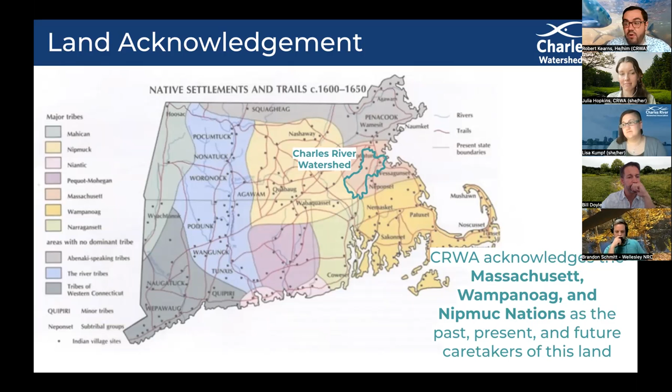Next slide. I know some of you are familiar with our work, but if you are new to CRWA, we are one of the oldest watershed organizations in the country, founded in 1965 by a group of concerned residents who really had a vision for cleaning up the quality of the river. We've come a long way since the song Dirty Water, and there's still a lot of work to do, including stream restoration, dam removals, increasing public health from the sewage overflows in the lower basin, but also stormwater pollution, which is impacting our river and tributaries all across the watershed. We have an interdisciplinary staff with different program areas, and our mission is to help protect and restore the river using science, advocacy, and the law, and promote environmental equity.

So we're really excited to be talking to you all today about stream restoration. It's a really hopeful topic, a very exciting topic. I'm going to go to the next slide.

You may be wondering, if you're not as familiar with the Charles River, you may know the lower basin in the Boston, Cambridge area, but the Charles actually flows all the way from Hopkinton, Mass, to Boston, similar to the Boston Marathon, but it's a lot longer—over 80 miles long. This map shows all of the different communities, the 35 cities and towns in the watershed, where all the rain falls, hits the surfaces, and that all gets into the river. We just wanted to give a perspective of that.

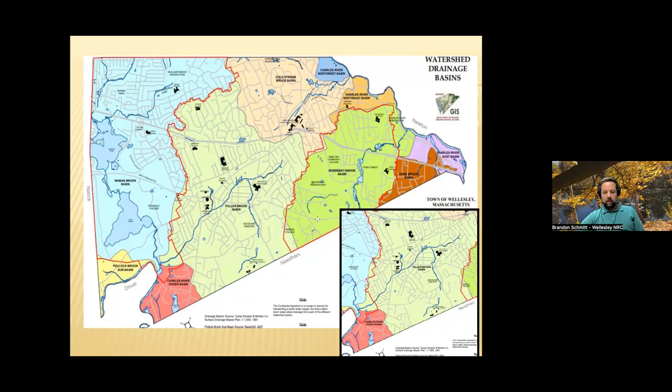Fuller Brook Park is in Wellesley, Massachusetts. The Fuller Brook, as well as the upper portion called Caroline Brook, are part of the Fuller Brook subbasin. It's the town's second largest watershed by area, but densest in terms of properties that contribute to it. The park is 2.5 miles long, encompassing 25 acres with approximately 120 direct abutters. The watershed itself is 3.2 square miles, or roughly 2,000 acres.

Just a quick outline: I want to go over some of the project history, the goals, which include trails and pathways, ensuring the historic features are maintained, and then the meat of this presentation is the stream restoration.

The park was first established in 1899 and finally completed in the 1930s. From its infancy, it was a multi-use park created to drain water from the surrounding lands and provide parkland and transportation. Along with the town's engineers, they worked with consultants including John Charles Olmsted from the Olmsted firm, Warren Manning, and Ernest Bowditch.

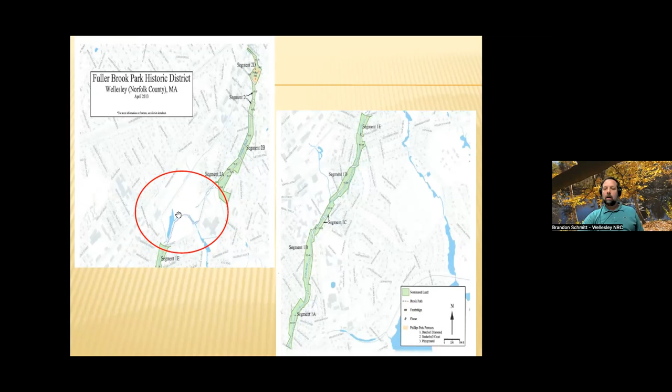The park, with the exception of the circle in the middle, is on the historic register, due to the firms involved and the park design from Olmsted in the 1900s. This area was considered too disturbed - it includes our high school track and field, as well as a series of other athletic fields, and the stream is actually still culverted until it reaches a pond here.

I want to acknowledge that due to the multidisciplinary nature of this project, town meeting formed what was called the Fuller Brook Park Coordinating Committee. This was an appointed board by the moderator, and hours and hours of work went into that from those volunteers to make this possible.

I'll just mention the final price tag - I think what was funded was about $5.5 million. Grants were able to bring that cost down, but that's just giving you an idea of what it cost.

The project goals were to improve the pathways, improve vegetation, maintain the historic features, and improve the drainage in the stream course.

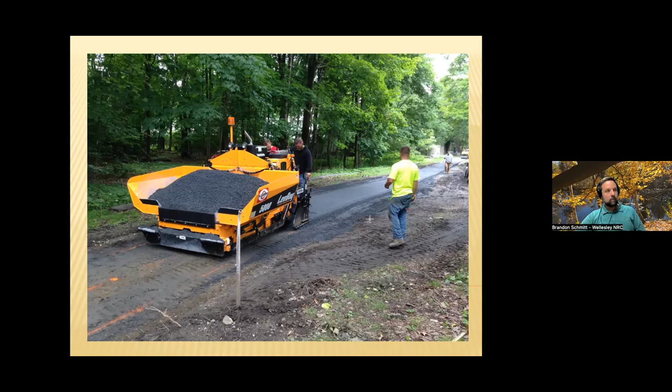In very low-lying areas where there's wetlands, they built raised boardwalks. They also addressed street crossings that were not marked and curbs that were not cut - that was all part of the project as well.

One of the unintended consequences is that now that more and more people are using it, we're dealing with policy discussions about how to deal with mixed pedestrian use with bikes, and now with e-bikes - how are we going to regulate that?

That's a consideration. We included new wayfinding signage for the park, new access points perpendicular from various neighborhoods. And there's a series of bridges that were added on after the fact - we said, while we're in here doing work, we might as well replace these bridges that cross the brook.

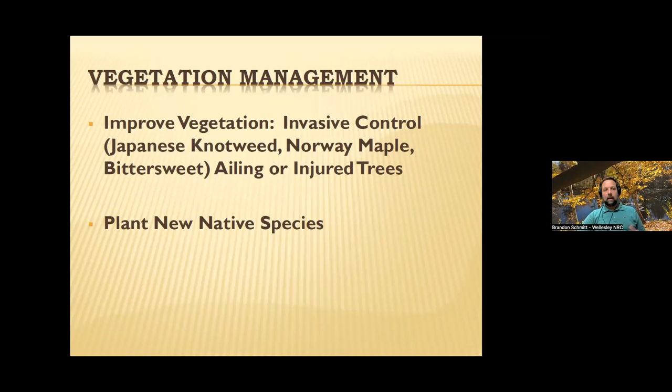So vegetation management, as I'm sure everyone on the call is familiar with, we have invasive species and we're still dealing with those—primarily Japanese knotweed, Norway maples, bittersweet, ailing and injured trees—and of course we wanted to add new plant material.

First up, these are mats that were installed to cover knotweed, essentially sterilize it. These are still in place 6 years later. We're not really sure what to do about this, but we did put in our capital budget this year a small request to do a test plot and see what happens. We're working with a consultant who will do the physical maintenance when we pull it up. We suspect the knotweed will still be there and be more than happy to grow back, but there's a series of these mats. They're not popular, but effectively they're keeping the knotweed at bay at this point.

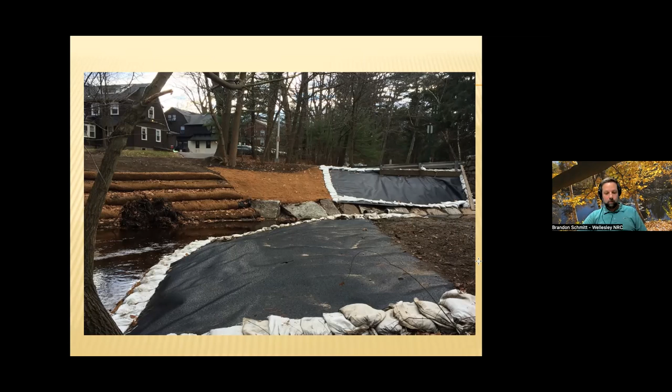Here's another picture, just giving you an idea, with the coir fabric on one side, the stream construction, and then the knotweed on the other.

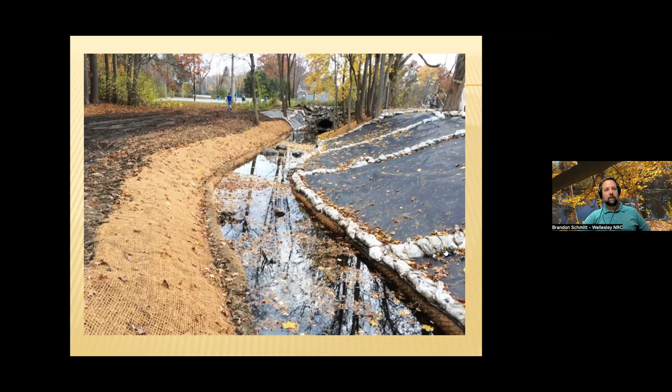We hydro-seeded a lot of the areas adjacent to the path, and you can see someone down here removing knotweed. Same thing—we tried to preserve some trees, and we have seen knotweed popping up here. Again, 6 years later, it's still there. It's just going to wait.

Some of the trees we were able to preserve, like this one, was popular, so they dug it up and relocated it.

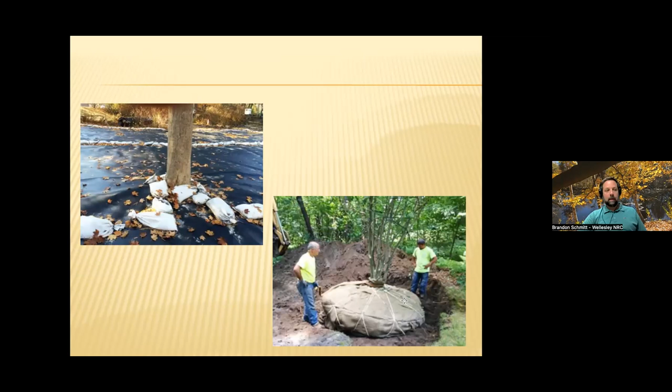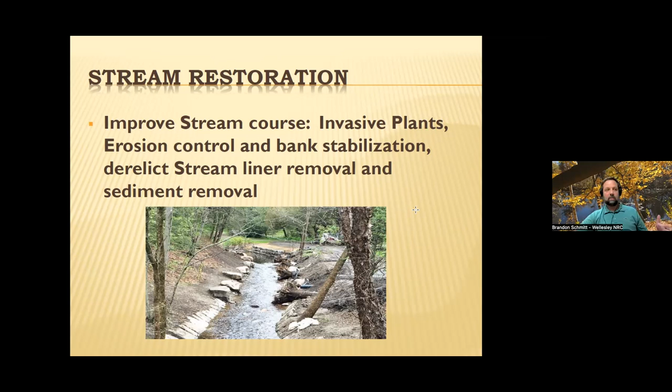It's small, and in a big rain event, it does get flashy. So we wanted to slow it down, provide habitat, and prevent flooding.

In order to construct sections of the stream, they would have to essentially take them offline, run them through pipes, 150 feet at a time, using pumps and hoses.

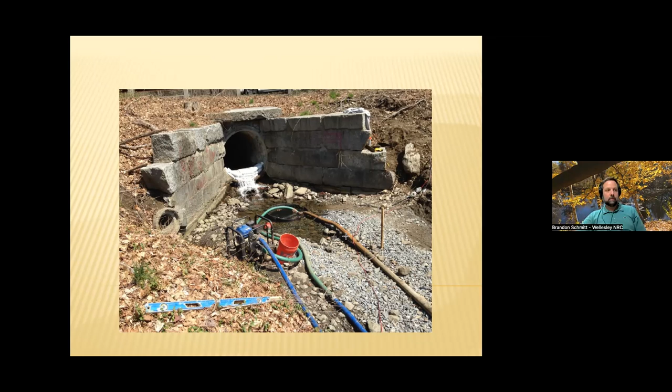Here you can see sediment deposition. So this was a big thing, recarving the base of the stream.

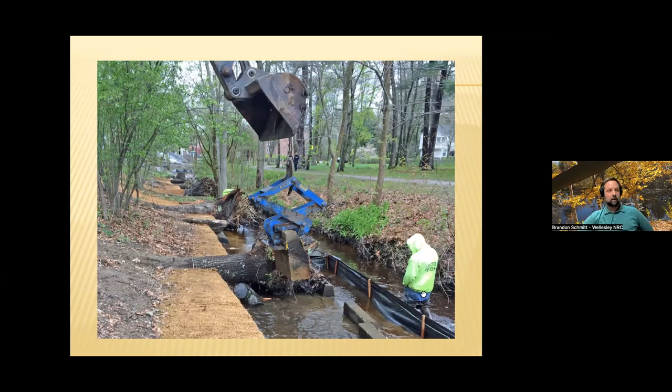These revetment walls they built wherever there was kind of a hard curve, stabilizing that.

Rock vanes are these rocks that they put in to add oxygen to the water and provide habitat.

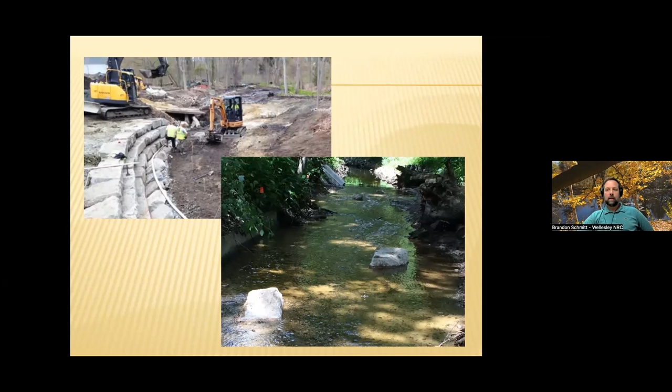I just put this on—this is a specification. So some of the walls and the coir fabric, we would use live stakes, so planting dogwoods.

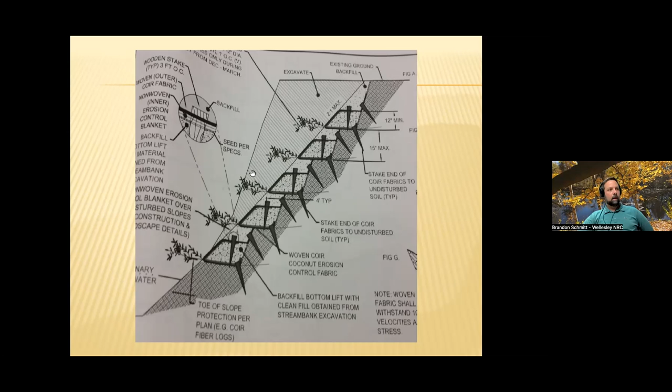This is the specification for what's called a root wad. They would remove mature trees, typically Norway maples, and shove them into the bank. This is really what's stabilizing the bank, with the flow of water going from left to right in the picture, and it provides additional habitat and additional agitation to add oxygen.

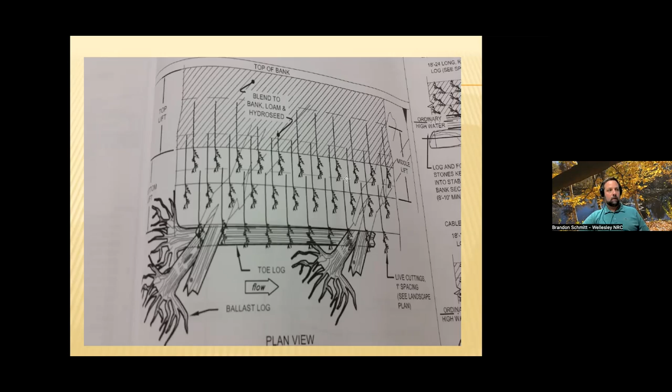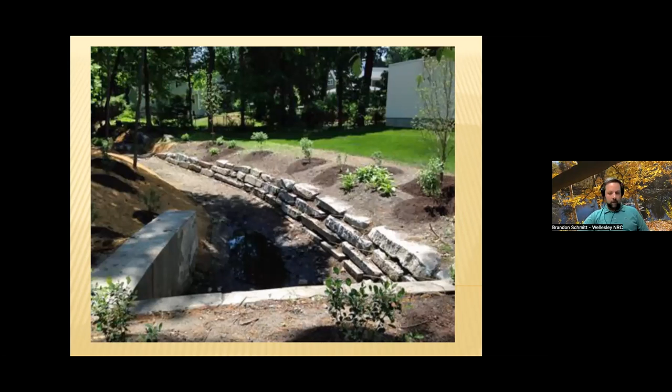More pictures during construction. Rock vanes, bypassing the stream here, dewatering it. They had to be careful with fish migration and time of year.

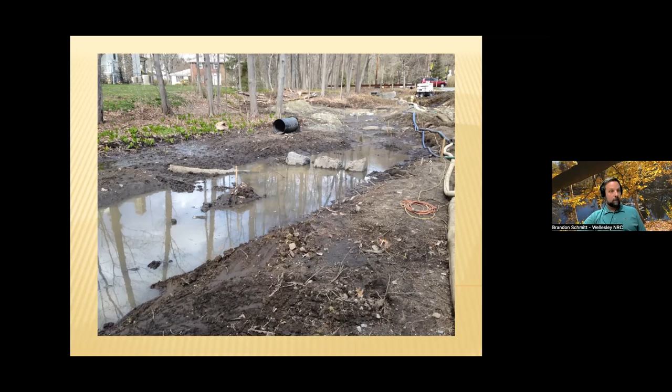They created this meandering stream. It looks really nice. All of these are looking from Forest Street west, if anyone's interested.

So the bioretention basin, this was a really neat feature that they were able to include two of these. These are just areas where they dug a depression, and they're really engineered to accept stormwater at a certain rate and then slowly drain. They're filled with native plants.

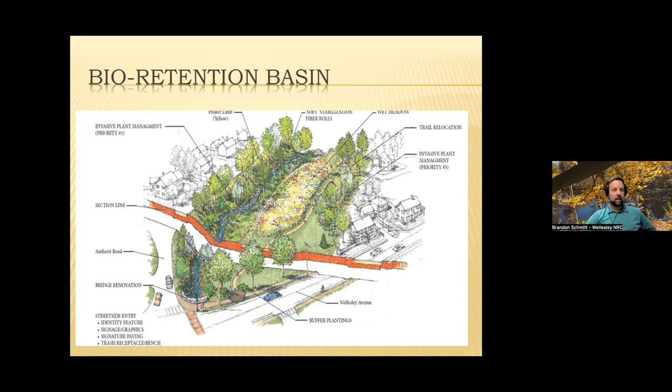This was funded by an EPA grant. The total project cost for these was about $561,000, and the EPA kicked in $337,000. So we were able to take advantage of some grants, and these are really a neat feature of the park. You can tell they look natural, but they're highly constructed features of the park.

There's plant material going in, and this is kind of what they look like now. There's a chamber on either side where water comes in and slowly fills in. These plants take up nutrients, absorb water, and decontaminate the water to some degree. Then eventually, if there's overflow, it goes back out into the stream. This is what it looks like now.

I just included this picture to show you the range of plants that were included in that bioretention area. Quite a large palette of plants.

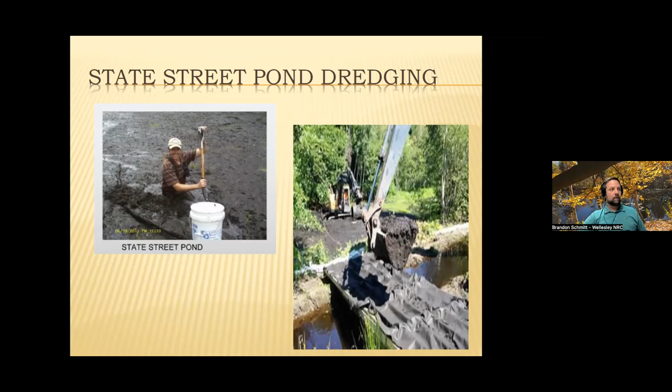In addition to the stream restoration, there is a pond that I pointed to on the previous slide. Again, we were thinking, while we're in here, why don't we dredge this pond? You can see this poor guy stuck waist deep in the muck. So they built a little bridge with a filter and reached over from land into the pond, and were able to dredge that, adding to the environmental value of the entire project. This is the view of that pond.

One feature we're still dealing with is this area called the flume, and no one in town, at least that I know of, has a real clear picture of what this is actually for. But it does present a barrier for fish migration. We have white suckers that travel here, and we've had staff from the Fish and Wildlife Service come and think about a design using sandbags.

But people like this feature. It's a waterfall, it has the sound, and it's a highly visible area of the park. But it is an area where you go down there and really see the fish struggling. Actually, I've seen one out of every fifty attempts make it over. So this is something we want to continue to think about, how we can improve fish passage here.

But for the time being, the residents are happy to get their nets and buckets and help the fish up. So I'll stop there. It looks like we don't have much time for questions now, but I'm happy to take those at the end. My contact information is here. Please reach out if anyone has any questions. Thanks.

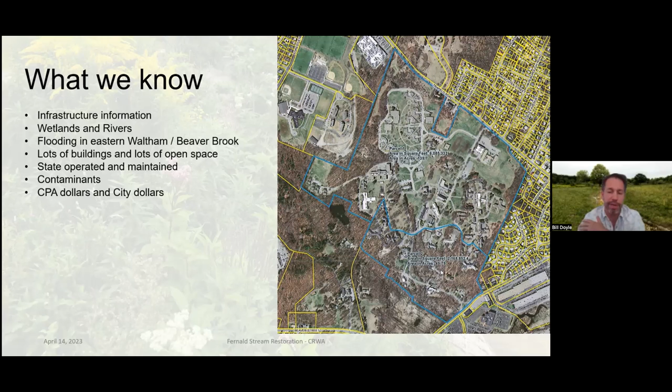CPA is the Community Preservation Act, initiated by the state to allow towns to provide money for things that would preserve the town's character, natural resources, and such. So that's kind of what we know.

So when you have 200 acres within the 128-95 belt, everybody's going to have an idea of what to do with it. I won't say it's pristine acreage, but it's clear, undeveloped land that would have a high value to it.

So what we did see is a lot of ideas coming from everywhere. The group, how I got involved with this as a resident of Waltham, was through the Fernald Working Group, which was basically a group of residents in town.

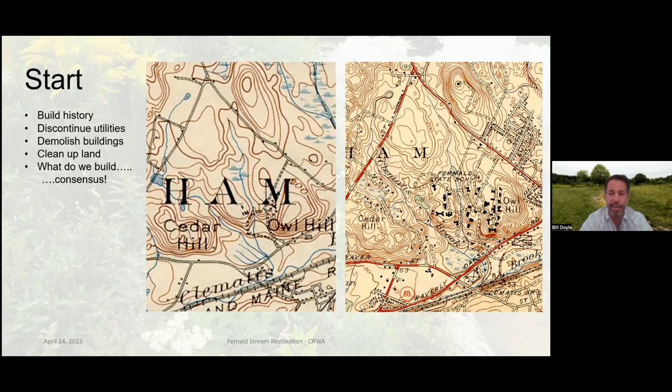I don't want to say it's political, but it was just getting everybody on the same page. And what we ended up doing is we kind of got the green light. A couple of us in the Fernald Working Group got the green light to say, well, if you were to fix this, if you were to get a stream back here, what would it be? So literally me and one other...

Diana Young from the Fernald Working Group, we got together one day in the public library. We sat down and we just drafted up what an RFP for this would look like, to get an engineer out here to design what should be here. And that's what you see on the right, on the left, the cover page of that RFP that we pulled together.

In 2014, so 5 years after we had done some planning, and that was 5 years after we had looked at purchasing the property. On the right is the actual plans that were developed, and you notice the date on that, 2019.

So this is not for the faint of heart. It's not for the impatient to do these things. And again, I don't want to say it's politics, but it's more consensus building. And this path of getting a bunch of us getting to this RFP and getting it turned into what essentially became the design plans for it took all of the consensus.

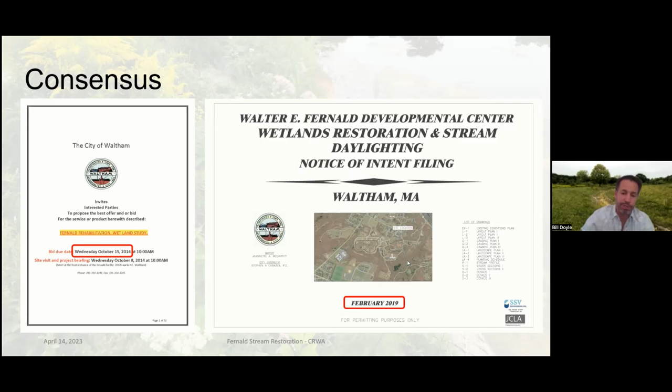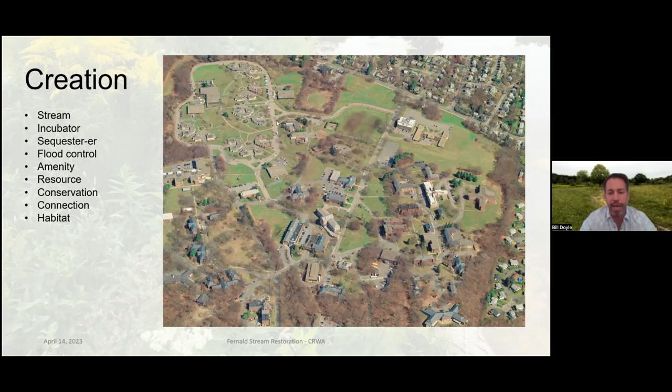And this is what we get. I just zoom right into it. We'll get just a bunch of photos right here. There was design plans, but we didn't need to get too heavy into it. It was just really get rid of the buildings and get rid of the dirt that was put in place and let the water kind of do what it does.

And there's the coir logs, there's the embankments, and there's all these other details. But in my opinion, showing a bunch of pictures of what it looked like from that to this is what it looks like today. We have a stream coming in.

You see it from the right. We did build a pond because we recognized that there was a pond there before. And as we were digging, we could see old foundations. We could see old fill material. We could see a lot of garbage that we didn't know we were going to hit.

But then we found the old peat. We found the old organic soils and trees and stumps and everything that was there from the wetlands that existed. We created this from what you saw 3 slides back.

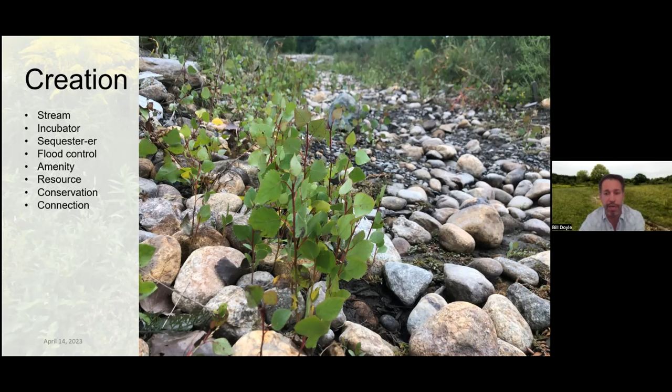And most of this, we did have design plans. And I don't want to say they were great design plans, but really it was the artistic nature of the contractors out there with the J hooks and with the armored embankments that were completely done with all natural stone found on site. And we created this.

These are obviously little footprints of raccoons and everything. And this was finished. This is the stream channel as it comes down. This was built last spring, and these are midsummer last year. And as we all know, it was a pretty dry summer, so this didn't, it survived. It works great today. As you go out there today, you can see water flowing. But that's what we created.

The design of it was basically what was there before, and contractors. It was really what the contractors were able to do with their art, with their artistry, and be able to create. It's a phenomenal area. If you can remember back at those 3 or 4 slides to all those buildings that were in that area, this is what it looks like today.

The interesting part of it all right now, the fun part maybe, is that most of the people in Waltham, you're probably the group on this phone call right now, 50 or 60 of us, probably tripled the amount of people that know that this is there. Hopefully soon we'll be able to unveil it and get walking trails and everything else through here.

But with that, I will relinquish control, and we'll ask questions and go from there.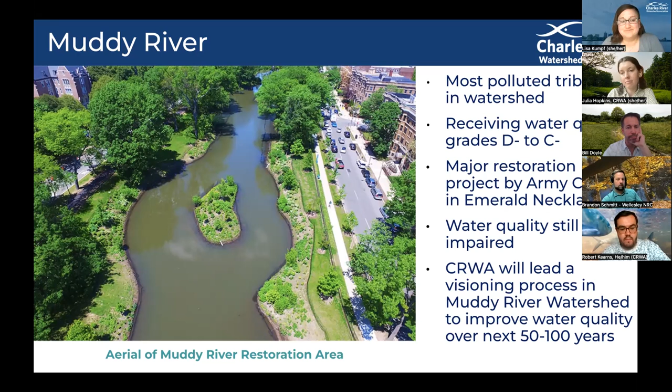Thank you, Lisa. We have a couple questions in the chat, and I wrote a couple down too. The first question is from Cornelia: some of our stream is under pavement or concrete, owned by private developers or private property. Did you encounter privately owned land in your projects? If so, how did you handle that?

Brandon, that's you. Ours was all on public land. Yeah, ours as well. There are direct abutters, and it involved an extensive survey of the entire park, but all of the work took place on public land.

I can answer that to some degree, not necessarily with our project, but with other projects in town. I'm on the Conservation Commission, and a lot of our rivers and streams, including Beaver Brook, which is tributary to ours, have a lot of stream on private property. When there are log jams or collapsed culverts on those private properties, it becomes the requirement of the property owner to fix them and stop them from constricting the stream. But there is some ability for the municipality to come in and say, look, it's causing a flooding situation, and kind of force the issue. Ultimately, in these quasi stream drainage situations, especially in urbanized cities and towns, there is a responsibility to keep these things clear.